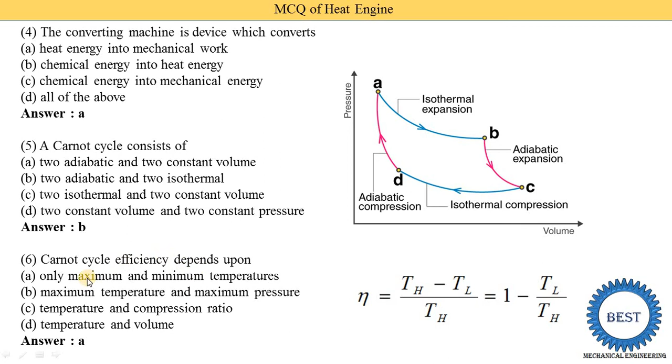Carnot cycle efficiency depends on which parameter? Option A only maximum and minimum temperature, option B maximum temperature and maximum pressure, option C temperature and compression ratio and option D temperature and volume. For that we need to know the equation of efficiency of the Carnot cycle, that is TH minus TL upon TH. TH means higher temperature and TL means the lower temperature, means maximum and minimum temperatures. That means option A is the correct answer. The Carnot cycle efficiency depends only on the maximum and minimum temperatures.

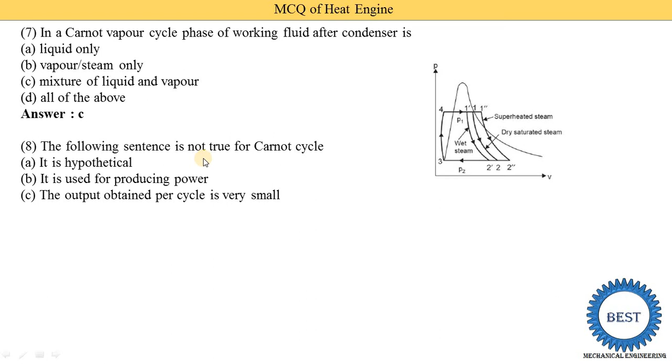The following sentence is not true for a Carnot cycle. Option A, it is hypothetical. Option B, it is used for producing power. Option C, the output obtained per cycle is very small and option D none of the above. So here option B is the answer, it is used for producing power. They are asking about not true, means option B is not true. The Carnot cycle is the ideal cycle, it is not used for producing power.

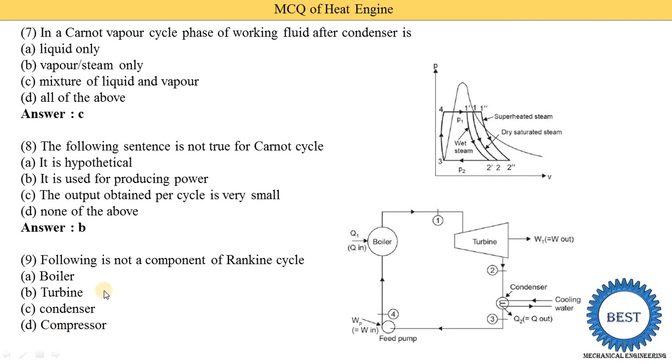Which of the following is not a component of the Rankine cycle? Option A boiler, option B turbine, option C condenser, and option D compressor. Now here you see this diagram of the Rankine cycle. In a Rankine cycle there are basically 4 components: first the boiler, second the turbine, third the condenser, and fourth the feed pump. So the compressor is not a component of the Rankine cycle. The correct answer is option D.

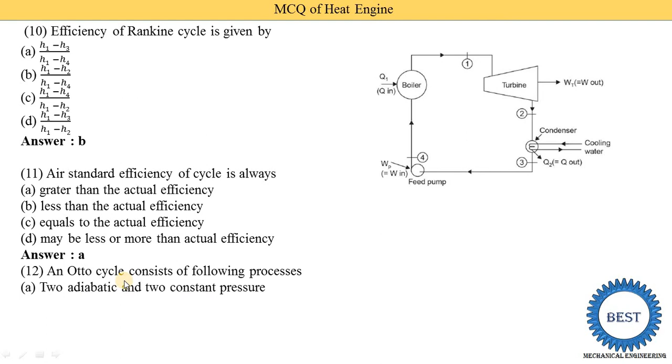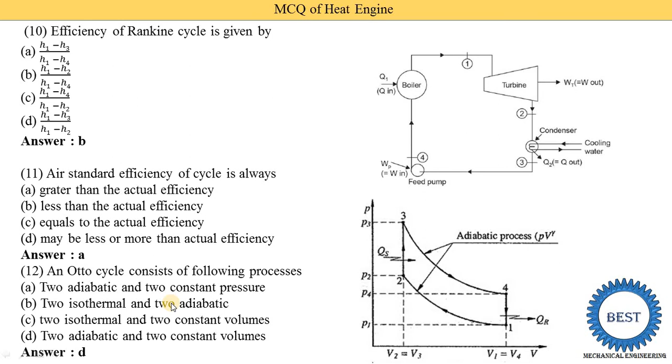Next, the Otto cycle consists of which processes? Four options are given. For that we at least need to know the PV and TS diagrams of the Otto cycle. Here is the PV diagram of the Otto cycle. There are 2 adiabatic processes, 1 to 2 and 3 to 4, and 2 to 3 and 4 to 1 are constant volume processes. So option D is the correct answer: 2 adiabatic and 2 constant volume processes. The same question is possible for the diesel cycle, the Rankine cycle, and various other cycles.

The Otto cycle is also known as: constant pressure heat addition, constant volume heat addition, constant temperature heat addition cycle, or none of the above. Here is the PV diagram. QS is written, meaning heat supplied. During the 2 to 3 process heat is supplied, and during 2 to 3 the volume is constant, V2 and V3 are the same, so heat is supplied at constant volume. So option B is correct: the Otto cycle is also known as the constant volume heat addition cycle. The same applies to the diesel cycle, which we discuss later.

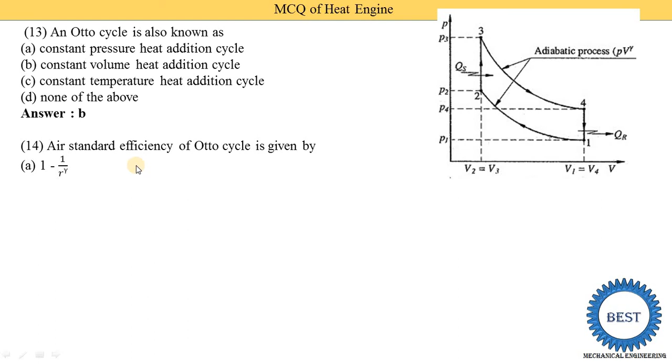Air standard efficiency of the Otto cycle is given by which equation? Various equations are given, and the correct answer is option C. This is the correct equation for the air standard efficiency of the Otto cycle. The same question is also possible for the diesel cycle, which we discuss later.

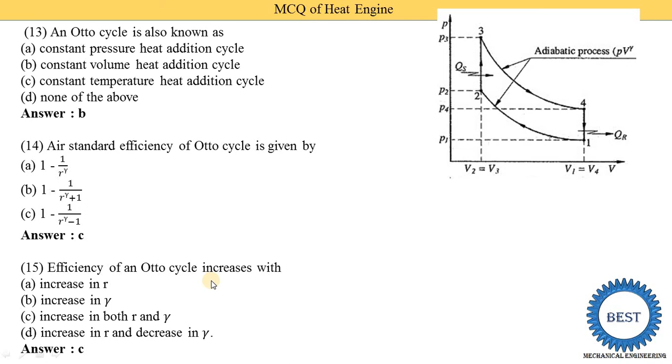Efficiency of an Otto cycle increases with which parameter? Option A increase in R, the compression ratio, option B increase in gamma, option C increase in both R and gamma, and option D increase in R and decrease in gamma. Option C is the correct answer. If we increase the compression ratio the efficiency increases, or if we increase gamma the efficiency of the Otto cycle also increases.

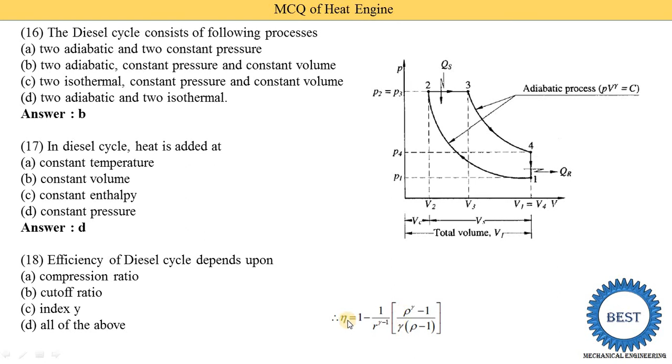So here you see this is the equation of the diesel cycle. That is 1 minus 1 upon R raised to gamma minus 1, into bracket cutoff ratio raised to gamma minus 1, divided by gamma into bracket cutoff ratio minus 1. Here R is compression ratio, cutoff ratio is rho, and the index gamma, means efficiency of the diesel cycle depends on all of the above factors. So option D is the correct answer.

Which of the following is not an air standard cycle? Option A, Rankine cycle. Option B, Carnot cycle. Option C, Otto cycle, and option D, diesel cycle. So here option A is correct. Rankine cycle is not an air standard cycle.

In a Carnot engine, Q1 is given as 350 kilojoule per second, T1 is 600 Kelvin, T2 is 340 Kelvin. What is the output? The options are 100 kilowatt, 130 kilowatt, 152 kilowatt, and 181 kilowatt. We need the efficiency of the Carnot cycle, which is TH minus TL upon TH. 600 minus 340 is 260, and 260 divided by 600 gives efficiency equal to 0.433.

Another equation for Carnot engine efficiency is output upon input. Here Q1 is the input, so we multiply 350 by the efficiency 0.433, and we get 151.66. In round figure it is 152. So the correct answer is 152 kilowatt.

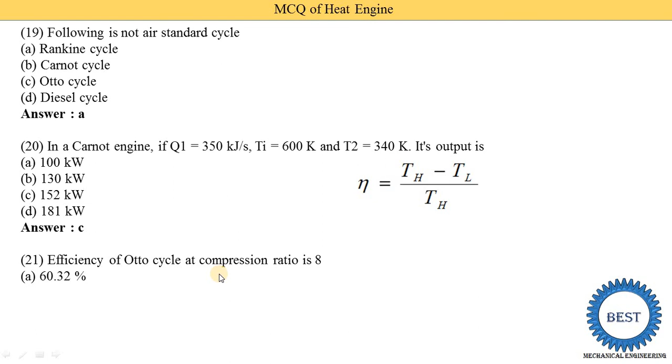Efficiency of Otto cycle at compression ratio 8, considering gamma equal to 1.4. What is the efficiency of the Otto cycle? The equation of the Otto cycle is 1 minus 1 upon R raised to gamma minus 1. R is 8, the compression ratio, gamma is 1.4. When we solve this equation, we get the answer, option B, 56.47%.

The air standard cycle on which a petrol engine works is? We already know the petrol engine works on the Otto cycle. So the correct answer is the Otto cycle, option A.

For the same compression ratio, the thermal efficiency of the Otto cycle compared to the diesel cycle, which has higher thermal efficiency? Greater than diesel, less than diesel, equal to diesel, or none of the above. Option A is correct: the thermal efficiency of the Otto cycle is greater than the diesel engine.

Cutoff ratio is related to which engine? Carnot cycle, Otto cycle, diesel cycle, or Rankine cycle. In the efficiency equation of the diesel cycle we mention the cutoff ratio, so cutoff ratio is relevant to the diesel cycle. Option C is the correct answer.